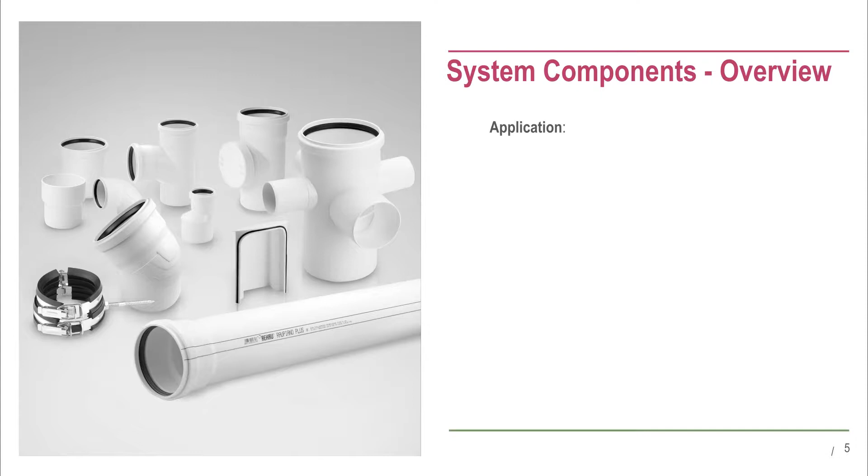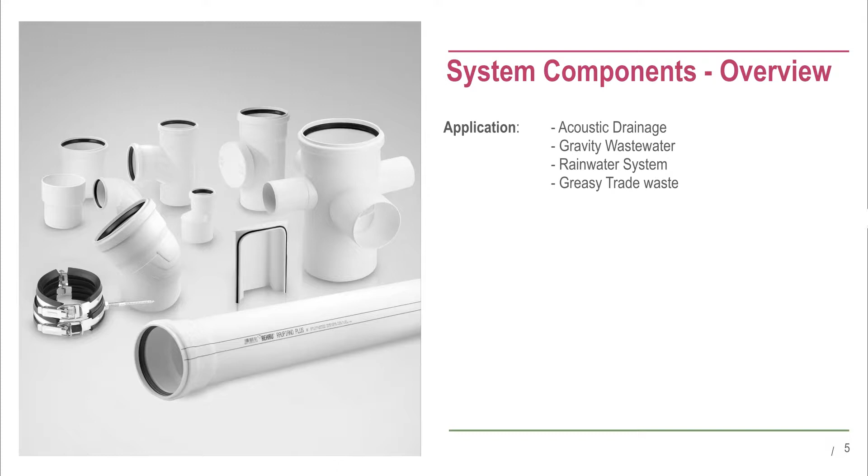System components. The first section of this training course aims to familiarize you with all the components of the Raupiano Plus drainage system. Raupiano Plus can be used in various applications. This includes its primary function as an acoustic drainage system, as well as gravity wastewater, rainwater drainage, and for greasy trade waste. Raupiano Plus can be used in buildings and in ground.

The base material of the pipes and fittings is polypropylene. The standard sizes available are 40, 50, 75, 110 and 160 millimetres. The push-fit system makes use of a rubber ring within the push-fit socket.

Raupiano Plus pipes are technologically advanced and are comprised of 3 distinct layers. The outer layer is made from an impact-resistant polypropylene material. The middle layer is a high-stiffness mineral-reinforced polypropylene layer that reduces vibrations caused by sound energy.

The smooth inner layer is made from abrasion-resistant polypropylene. Its low coefficient of friction makes it difficult for particles in the wastewater to adhere to it. These 3 layers work in harmony to create a lightweight pipe with excellent acoustic properties. The pipes are available in 250, 500, 1000 and 3000 millimetre lengths for ease of installation.

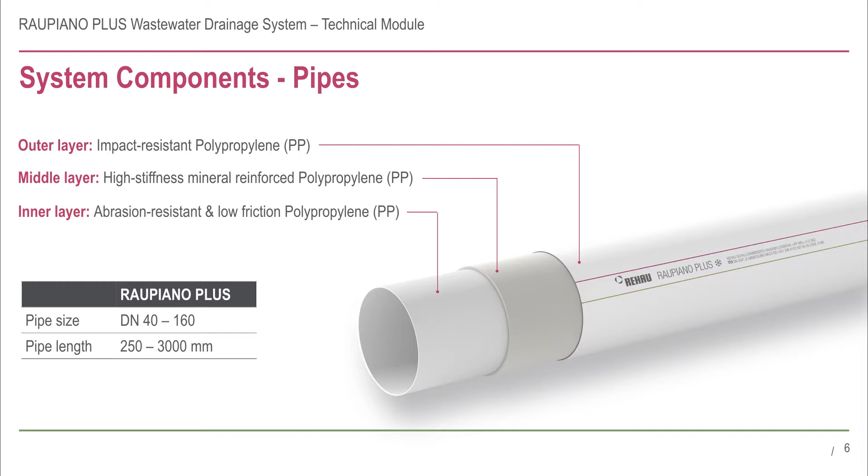Raupiano Plus fittings are also manufactured from high-density mineral-reinforced polypropylene with targeted mass optimisation. This is apparent from the characteristic swept profile of the bends. The impact area has increased wall thickness to absorb and dissipate sound energy, resulting in greater noise reduction.

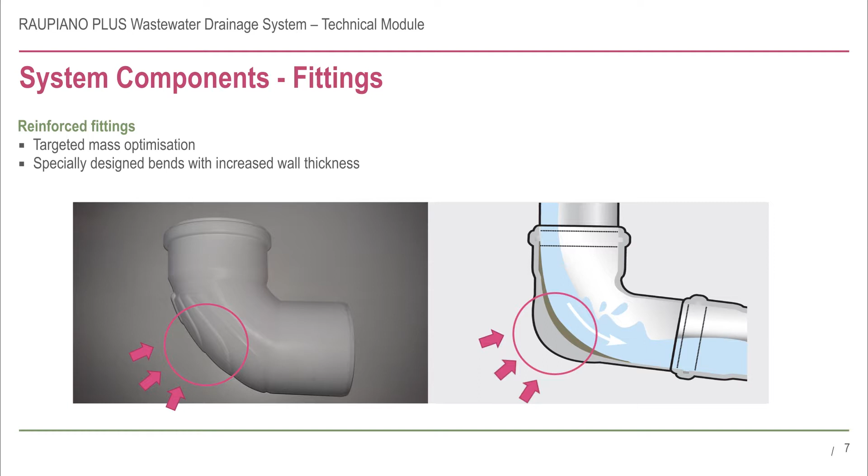There is a wide range of fittings at your disposal, including bends, branches and reducers. There are also market-specific fittings, specifically manufactured for the Australian-New Zealand market, such as PVC adapters and swept bends. Sharp bends are classified as elbows in the Australian and New Zealand standards and should not be used for drainage. The range expands year to year based on feedback and requirements from Rehau authorised installers.

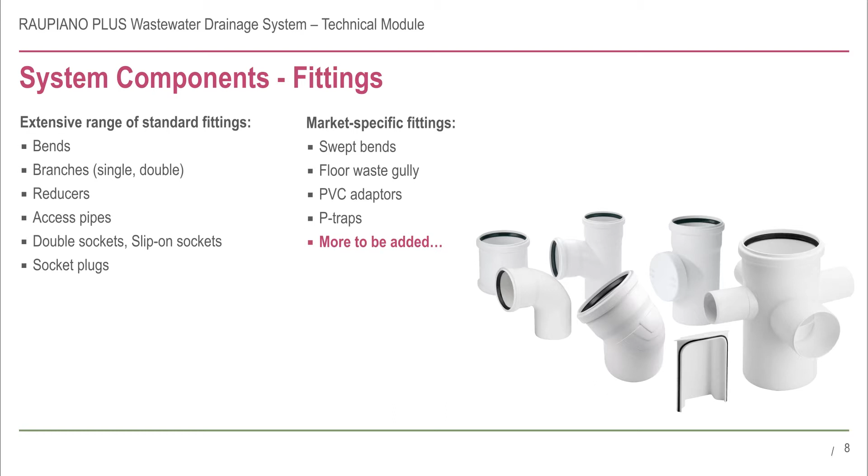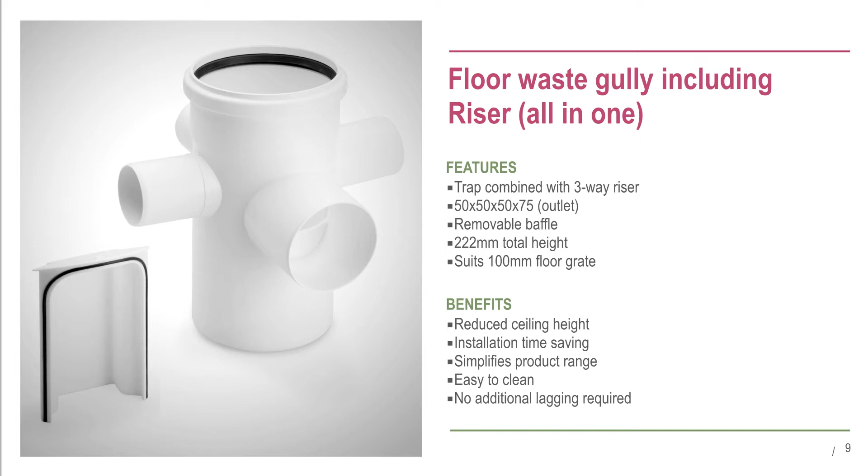Another fitting developed for the Australian-New Zealand market is the floor waste gully. This fitting is extremely compact and combines the function of a 3-way riser with a 75 mm water trap. It is compatible with a 100 mm floor grate and also has a removable baffle, making it easy to clean. As with the rest of the Raupiano Plus system, the unit does not require any acoustic lagging. The specific set of installation instructions in the Raupiano Plus technical information should be reviewed prior to installation.

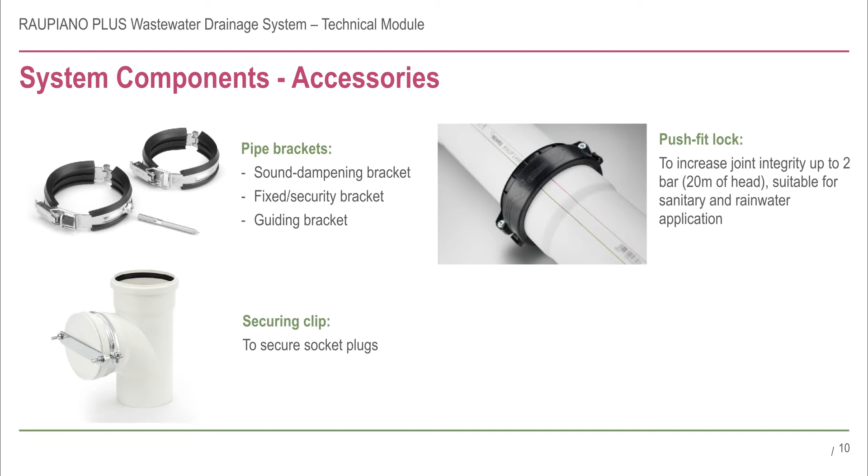The Raupiano Plus system also consists of accessories such as brackets, securing clips for the socket plugs, as well as the push-fit lock. The push-fit lock increases the joint integrity and can withhold up to 20 metres of head. The mounting brackets are particularly important components of the Raupiano Plus system. There are 3 types of brackets available.

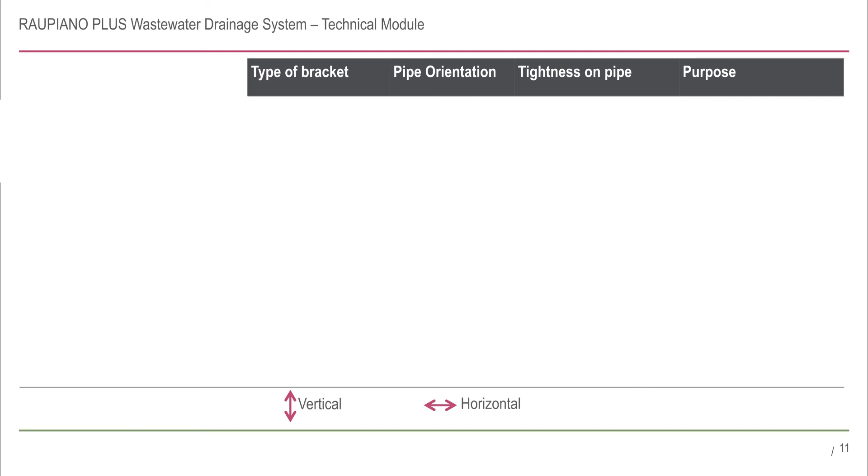Guiding brackets have a green rubber inlay. They can be installed in the horizontal or vertical direction and are installed loose on the pipe. They allow the pipe to move to accommodate thermal expansion and contraction.

Fixing brackets have a black rubber inlay and have ribs on the inside. They are usually installed in the horizontal direction behind the pipe socket and are tight fitting on the pipe. These brackets prevent the horizontal movements of the pipe. They are also used as security brackets in vertical stacks to prevent the stack from moving up.

Sound dampening brackets are actually formed from 2 brackets. The top bracket is installed tight on the pipe and is not connected to the wall. The bottom bracket is installed loose on the pipe and is connected to the wall. This bracket decouples the pipe vibration within the stack from the building. We will further break down the planning and installing of support brackets in a separate section.